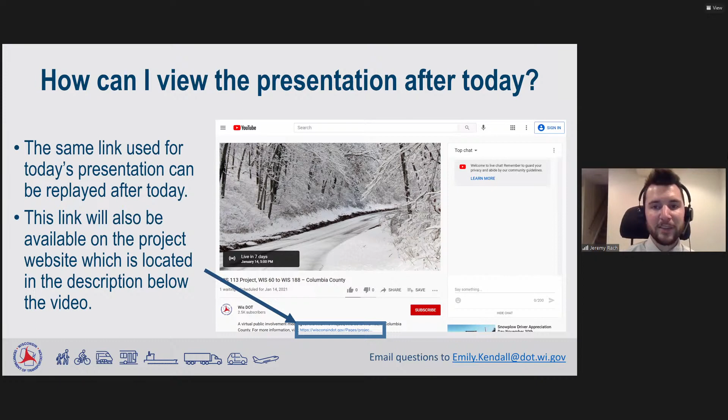The Wisconsin Highway 113 project will start just north of the Highway 60 intersection in Lodi and extend 6.2 miles northwest to the Highway 188 intersection at the Merrimac Ferry.

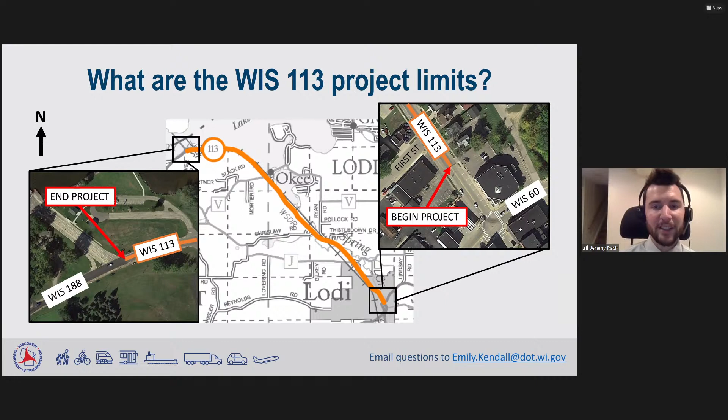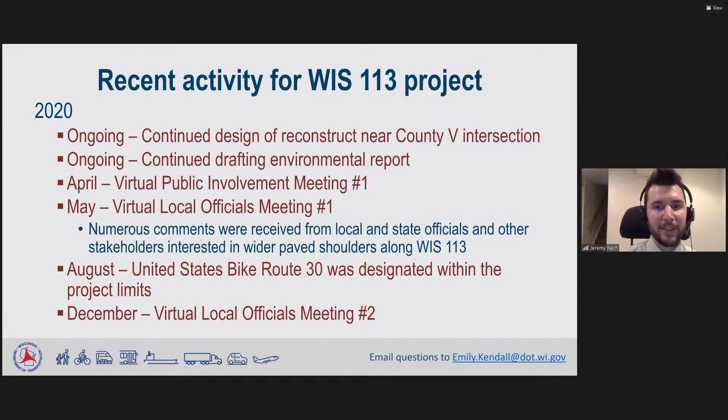In August 2020, the American Association of State Highway and Transportation Officials approved US Bike Route 30 and US Bike Route 230 as Wisconsin's first nationally designated bike routes. US Bike Route 30 is a bike route that crosses from east to west across Wisconsin, as part of a larger bike route network that has been expanding in recent years throughout the US.

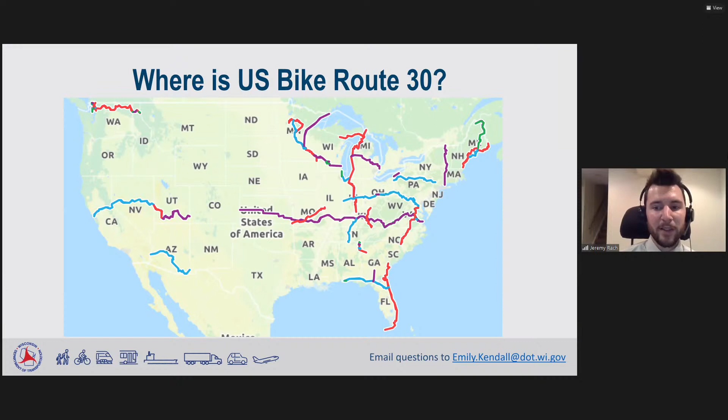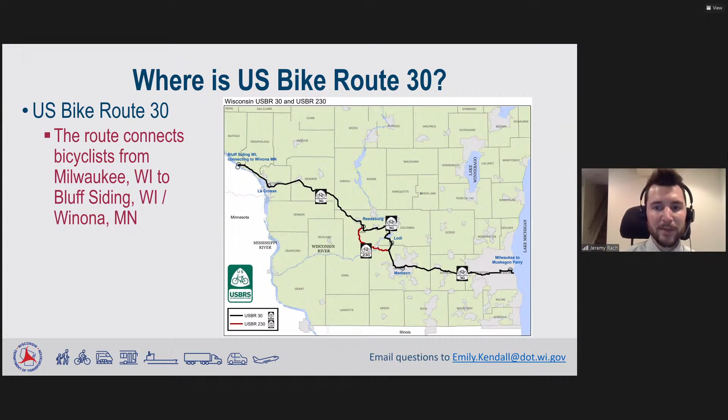Along the project limits, US Bike Route 30 utilizes Highway 60, Wisconsin Highway 113, Ryan Road, County Highway V and Ryan Road, then connects back with Highway 113 and crosses the Merrimac Ferry. After reviewing the public feedback and with the new designation of US Bike Route 30, it was decided to split this project into two separate projects, one being constructed in 2023 and the other in 2026.

Over these next few slides, I'll be discussing the design for the projects being constructed in both 2023 and 2026. The information shared on each slide will be in reference to the construction year, and the construction year can be found on the bottom right-hand corner of each slide in the black box. We'll be starting with the project being built in 2023.

This project will consist of resurfacing, seen in yellow on the screen, stretching from Highway 60 to County Highway J, and will consist of removing 3.5 inches of asphalt and paving back 3.5 inches of asphalt. From County Highway J to Wisconsin Highway 188 will be a thin overlay, shown with the red dashed line on the screen.

The blue section is the reconstruct section at County Highway V, and this section will see the lowering of the roadway by 8 feet to help improve intersection sight distance at the County Highway V intersection. Again, this project will be built in 2023.

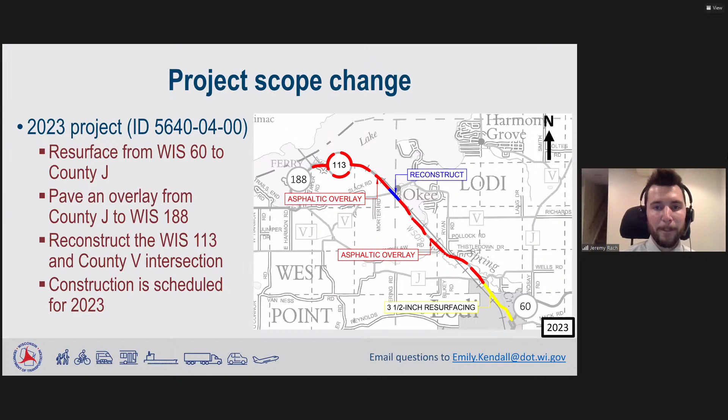One of the questions we have been receiving is why this project has to occur in 2023 and can't be pushed back to be with the other project. The main reason is that the reconstruction of the Highway 113 and County Highway V intersection uses Highway Safety Improvement Program funds, and these are federally designated dollars that require projects to be built in the year they are programmed. For this project, that year is 2023.

In addition, the DOT has concerns about the stretch from County Highway J to Wisconsin Highway 188 lasting until that future project comes through in 2026. This stretch of highway is experiencing lots of cracking and rutting and will definitely benefit from a thin overlay from 2023 to 2026.

This slide shows the future plans for the project in 2026. This project will involve resurfacing and widening the paved shoulders. With the shoulders being widened, that will require regrading of the ditches, and thus real estate will be needed for many parts of this project. Due to the amount of time required to coordinate with property owners and to complete the real estate process, it was determined that the shoulder widening cannot be completed as part of the 2023 project.

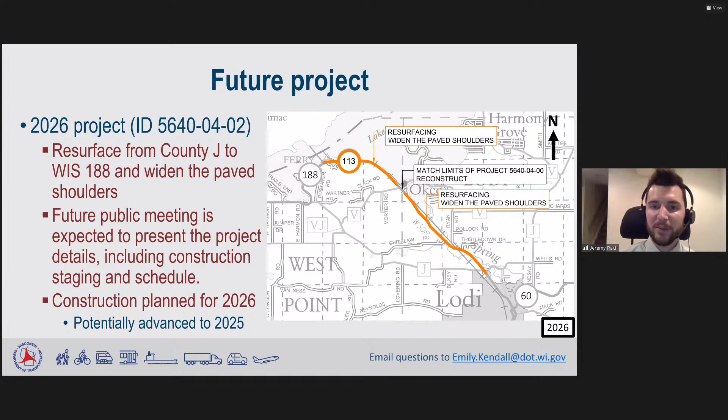A future public involvement meeting will be held to go over this project in more detail. Currently, construction for this project is scheduled for 2026, but there is the possibility of it being advanced to 2025.

This gets into the second main question: why can't this project be completed sooner than 2026? A lot of it has to do with our design process. With us expanding the scope of the project and widening the paved shoulders, we have a lot more impacts along the stretch of highway, and thus we'll need a more in-depth environmental report to go over this in more detail. Along with that, we'll have to coordinate with the railroads, which are parallel to much of Highway 113, and this railroad coordination can take up to a year and a half.

In addition, with the need for real estate, we'll need to develop a plat, and that plat development can take up to a year. The real estate acquisition cannot be started until that plat has been created, and the real estate acquisition takes about 2 years for a number of parcels required for this project.

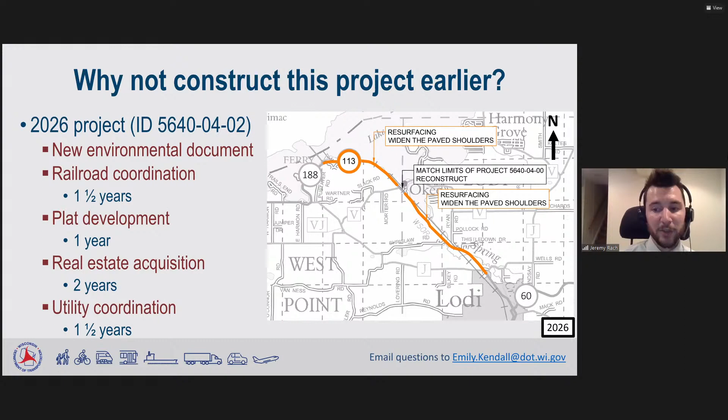In addition, with widening the paved shoulders, we'll have quite a bit of utility coordination that will need to take place, with the possibility of some utilities needing to be relocated. This coordination can take up to a year and a half. A lot of these steps can occur concurrently, however they still take quite a bit of time to be completed.

This project in 2026 provides multiple benefits for wider paved shoulders, especially for sections along the rural sections of highway. For one, it provides more space for vehicles transporting boats and other watercraft and other large loads that they might be hauling. In addition, it provides more space for farmers to haul around their large farm equipment.

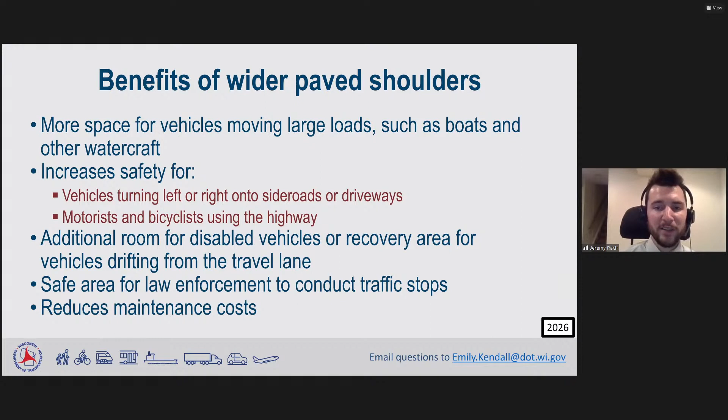It increases safety for traffic turning onto side roads or into driveways, as well as motorists and bicyclists using the facility together. It provides additional room for disabled vehicles to recover, or for vehicles drifting away from the travel lane to recover and come back to their lane. It provides a safe area for law enforcement to conduct traffic stops, and it helps reduce maintenance costs long term.

These remaining slides will focus on the design overview for the project in 2023. The design for this project is split up into two main sections: an urban typical section and a rural typical section. The urban typical section is for Highway 113 within the city of Lodi limits.

This section will consist of removing 3.5 inches of pavement and paving back 3.5 inches of pavement. The construction limits will be between the curb and gutter, and the curb and gutter will remain in place with this project.

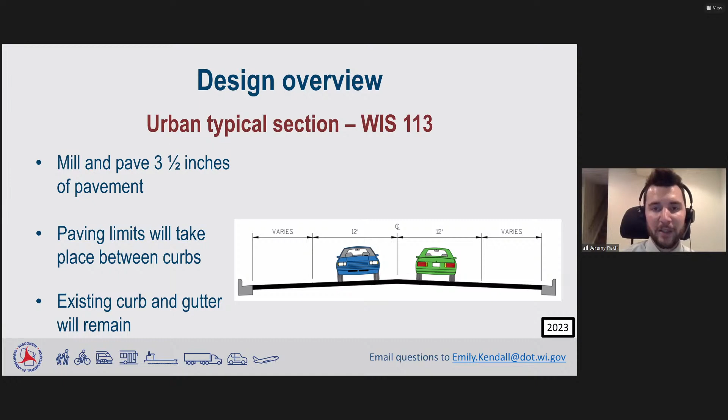The rural typical section covers the areas outside the city of Lodi, extending from County Highway J to Wisconsin Highway 188. These are the same areas that will receive wider paved shoulders with the future project.

As mentioned earlier, there were concerns about the existing pavement in these sections lasting until a 2026 project. So a thin asphaltic overlay will help reduce the maintenance costs to repair the existing pavement's cracking and rutting. There will also be new shoulder aggregate added with this project.

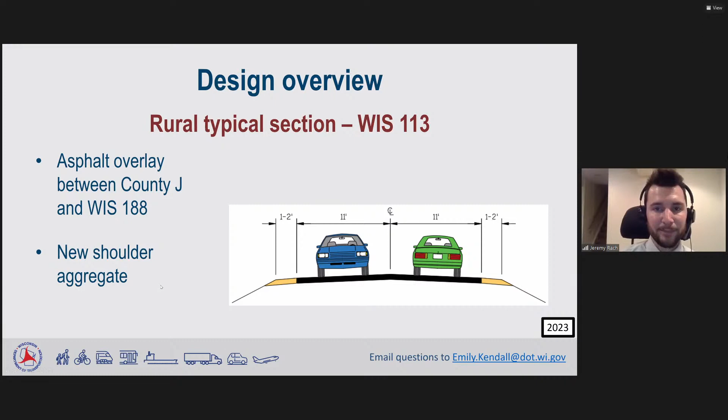Another element of the proposed design is the vertical improvement at the County Highway V intersection. This vertical improvement will extend from Shamrock Road to County Highway V, shown by this blue box.

The reconstruct section will lower the roadway 8 feet. To lower the roadway 8 feet, there will be quite a bit of grading that will need to be done, which is shown in red on the screen.

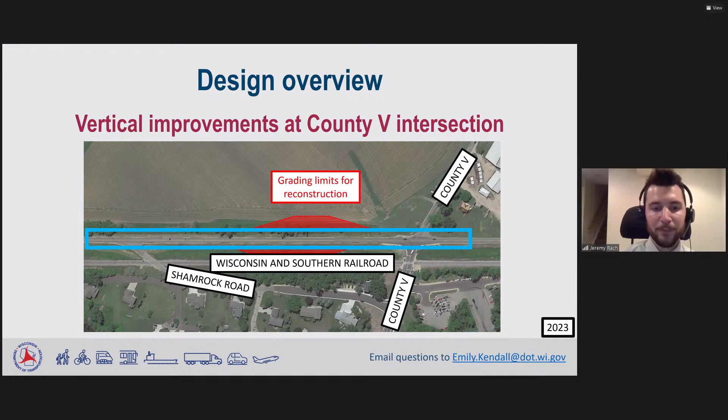Other improvements to the project in 2023 include replacing existing guardrail end terminals with the newer energy-absorbing terminals.

In addition, within the city of Lodi, the curb ramps will be improved to meet Americans with Disabilities Act standards. These curb ramps are located at 1st Street, 2nd Street and Locust Street, Chestnut Street and Fair Street, and at Gay Street.

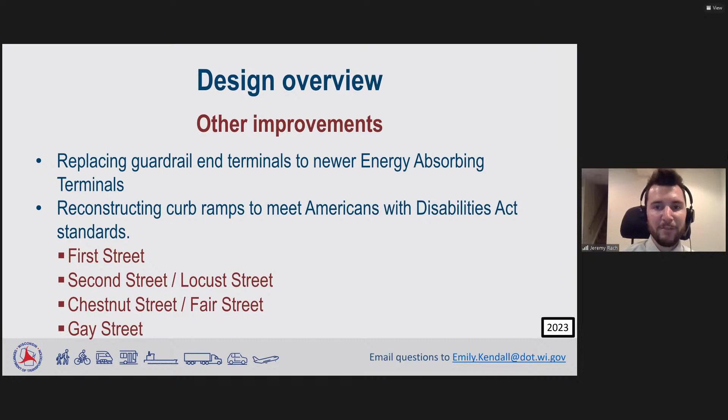During closures of Highway 113, a signed detour route will follow Highways 188 and Highway 60.

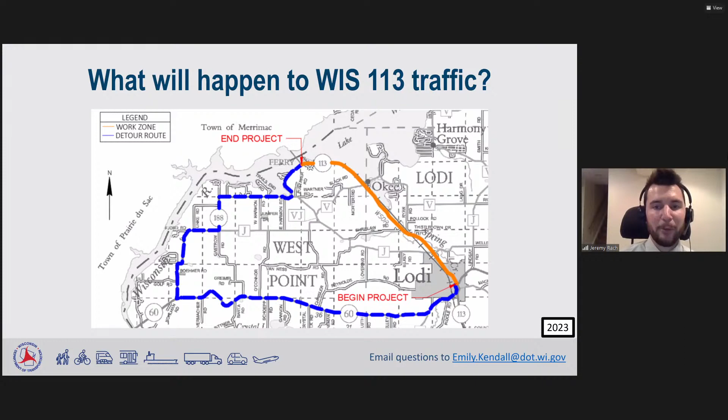As mentioned, the work on the environmental report has been ongoing, and a signed copy of that is expected by late January to mid-February.

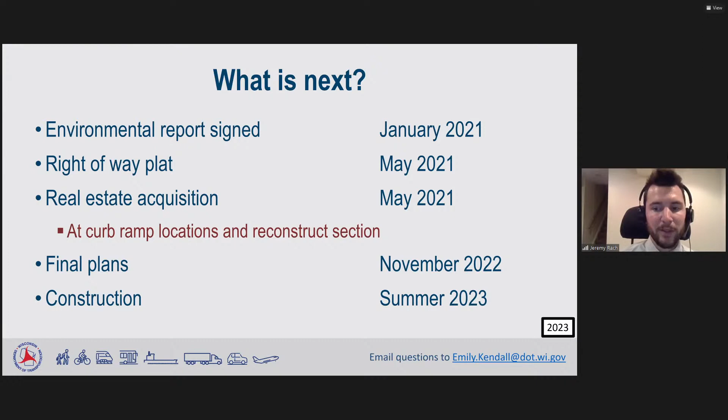The right-of-way plat is anticipated to be done by May of 2021, and real estate acquisition will begin after that. The real estate acquisition will take place at the curb ramp locations within Lodi and at the reconstruct section near County Highway V. The plans for the project should be finalized by November 2022, and construction is anticipated for summer of 2023.

The following Wisconsin DOT staff are overseeing this project: Bill Strobel, who is the project supervisor, Lalitha Balachandran, who is the project manager. As mentioned before, my name is Jeremy Rach, and I'm the project leader, and Emily Kendall, who is the design engineer. Emily will also be facilitating our question and answer session here at the end.